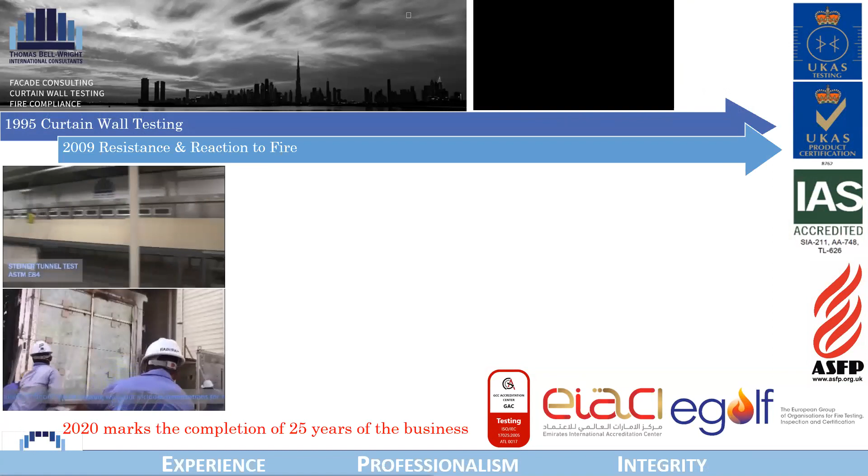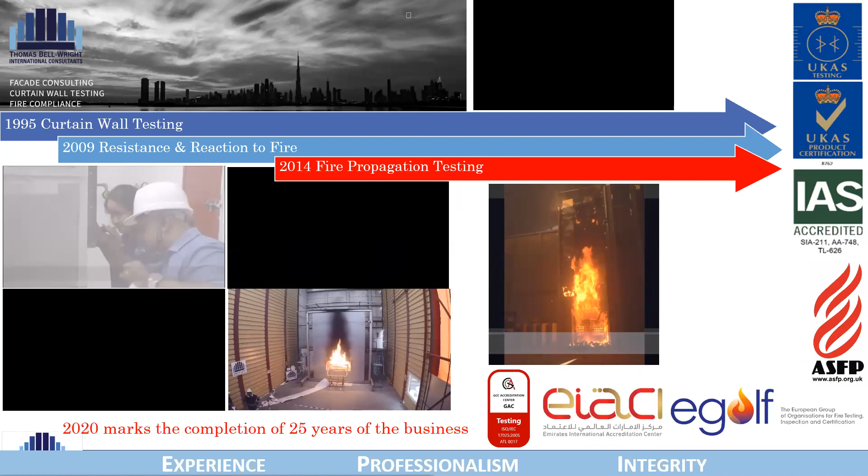Over the last decade or so, we extended our offering to do fire testing, starting with just fire resistance testing and some reaction to fire testing from our facility in Dubai. In the last 6 to 7 years, since I joined, we have grown and expanded in many directions, with an intense focus on cladding related subjects. We have reaction to fire tests to European and American test methods. We are probably the only accredited lab in the world to offer fire propagation tests as per the American standards, the NFPA 285, as well as the British standard, the BS 8414 test. We also have 4 fire resistance furnaces where we can help test and offer conformity services for an extremely large type of passive fire products, materials, and systems, whether fire rated doors, partition walls, or fire stopping material.

I'm assuming a lot of you might know me - you have been seeing my name on the emails related to the webinar. I am Abhishek Chhabra. I represent the company and am extremely passionate about conformity and compliance. Over the last 15, 20 years, I have been heavily involved in selling product conformity services related to safety and quality across several supply chains, whether construction building material, switchgear, renewables, and so on.

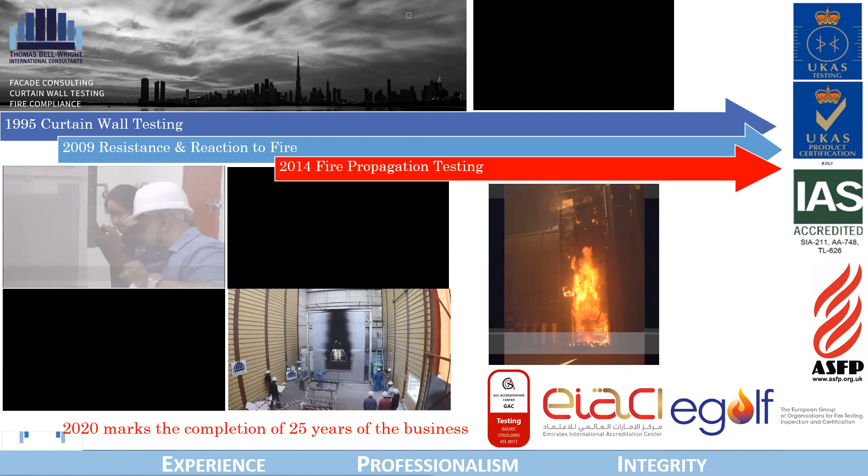Joining me is my colleague Sujana. You would probably see her screen pop up somewhere now or later when she starts to speak. She is a senior fire engineer with vast experience across a large number of tests. She's done probably over 400 reaction to fire tests in a very short span of time, and she is also responsible for the fire propagation tests. She will be talking a considerable portion of the session today.

Before we begin and talk in detail about the subject, I would like to say why are we here? A lot of you are probably familiar. The world over, the construction industry, the regulators, and the finance industry are struggling to solve the problem that has arisen from awareness about these big facade fires that have been happening almost everywhere in the world.

So we have a situation which has two parts. We have a problem related to existing buildings, and it is still not necessarily estimated as to how many buildings around the world are unsafe and have potentially combustible cladding.

Thousands and thousands of buildings are being designed, constructed, and built at this point in time. How do we solve and ensure that these buildings are safe when they start to get built?

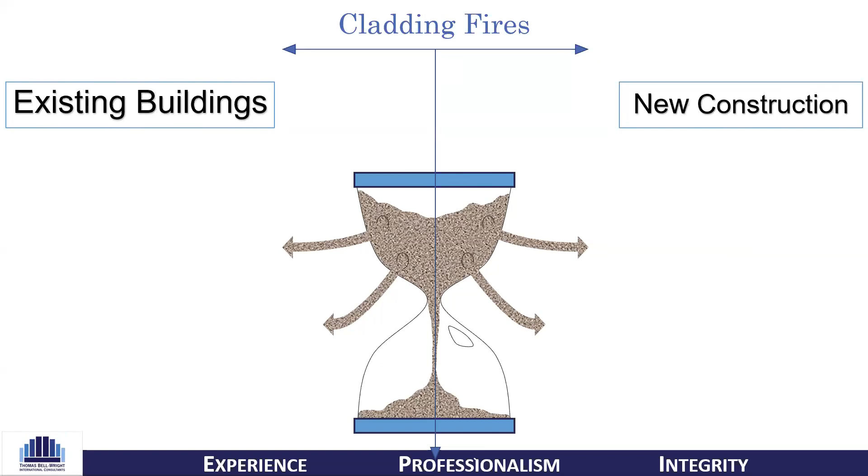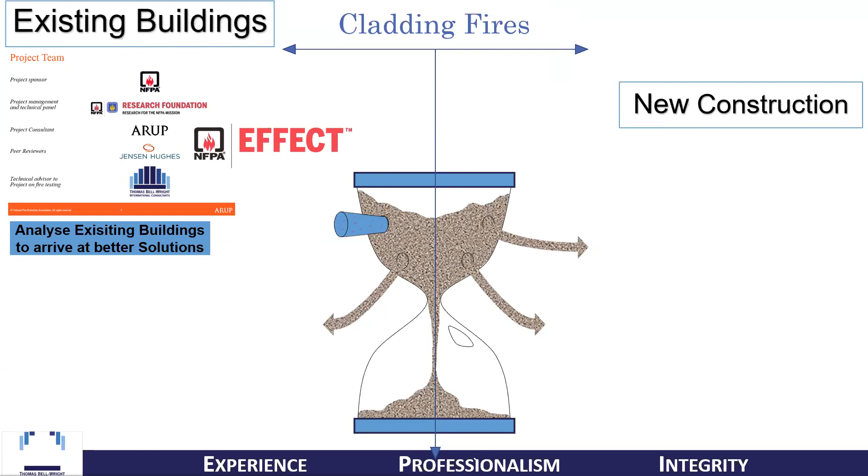Some of you may be familiar with the EFFECT tool, a freely available tool prepared by the NFPA's Research Foundation. Arup was the lead in helping develop this tool, heavily supported by Jensen Hughes as well as us, giving inputs related to correlation of how materials test and behave in small scale and large scale tests.

For new constructions, as a laboratory and with a lot of staff members, we have been heavily involved in supporting UAE's Civil Defense and various authorities in arriving at a better understanding of facade fires, and they have been able to come up with a fairly stringent code which has been implemented.

We have also been involved in several other initiatives, like supporting the Saudi Arabia Standard Organization in evolving a better standard for aluminum composite panels, in order to support implementation of not only the UAE Fire and Life Safety Code, but a better implementation of conformity and conformity assessment.

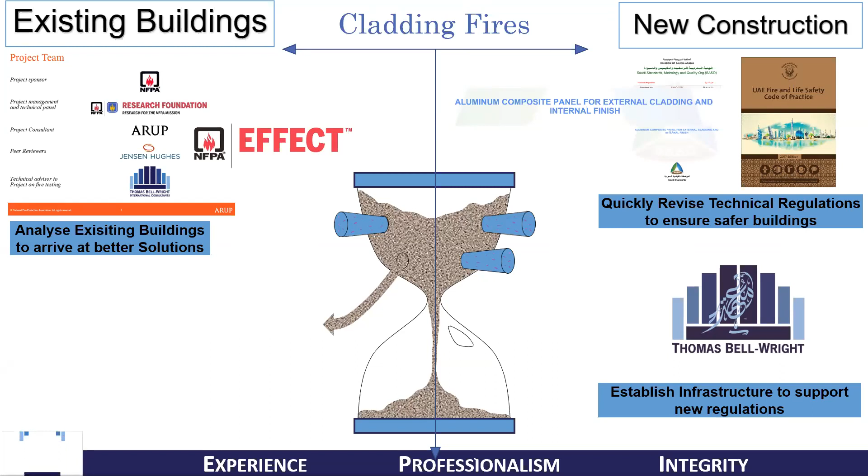We launched our certification mark and became a certification body, and our certification scheme related to materials and systems complying with various test methods and standards for facade application has been very popular. TBW Cert is our certification directory, and most likely at the end of the session, a link to it will open for you.

For existing buildings, we also supported a very exciting project for a solution created by Johnson Controls. On the bottom left of your screen, you'll probably see a small video showing how we built a massive wall, 25 by 35 meters, in our facility to help them demonstrate the successful functioning of their solution.

It's a very interesting active fire solution which senses a fire on the exterior side of an existing building. It's a retrofit solution that taps into the existing water riser, and it is able to sense and quickly bring any fire that is possibly breaking out under control.

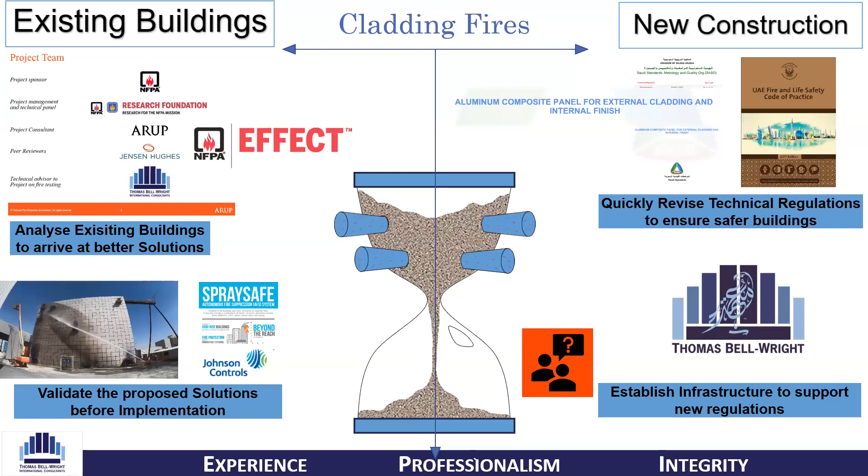What we aim to do today is bring about a much better understanding of three things which are very close to today's subject. These are things related to a mock-up: what is a mock-up, and when a system is mocked up in a lab and tested as per a mock-up test method like the BS8414, which we will be talking about today, or any other mock-up test method like the NFPA 285 — there are about 20-30 test methods around the world, many still in an evolution stage.

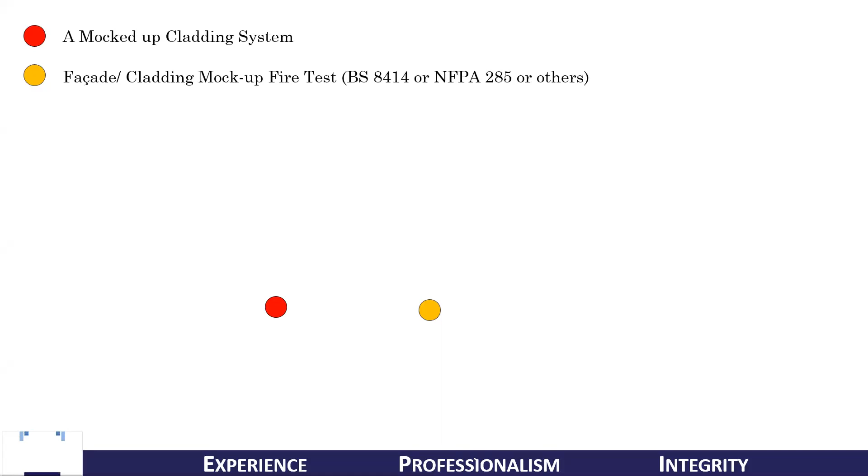And how these two dots not only link, but how they link with the end game in the mind of all of us investing time, effort, and energy in doing these large-scale fire propagation tests — the end game being that we would like to have fire-safe cladding. So how these three dots connect is the subject we will be talking about today in greater detail.

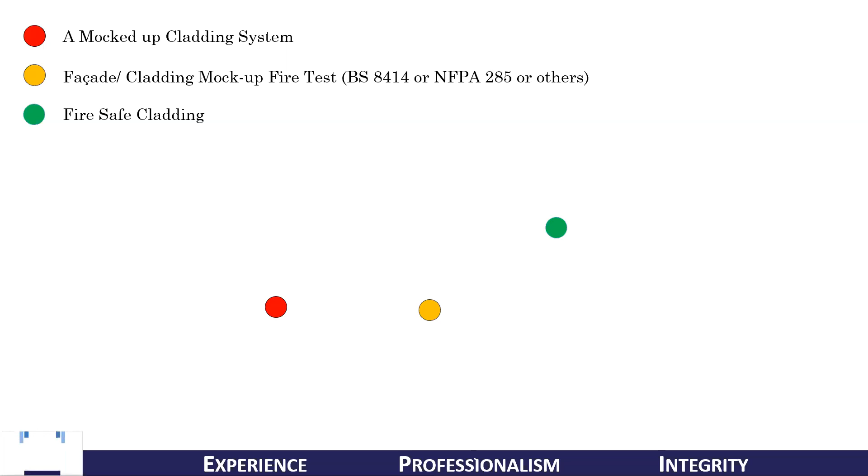After a few slides, I'm going to pass on the presentation screen to my colleague Sue. But before I do that, I think it's very important to understand that there are many things which come in between these two steps.

Even though as a part of this webinar we may not talk about all these things in place at this time, I feel it's important to bring these out to an extent so that when you're listening to the slides, understanding what the test method is and how the test results are used and can be used, it will be good to know this is part of a much larger situation.

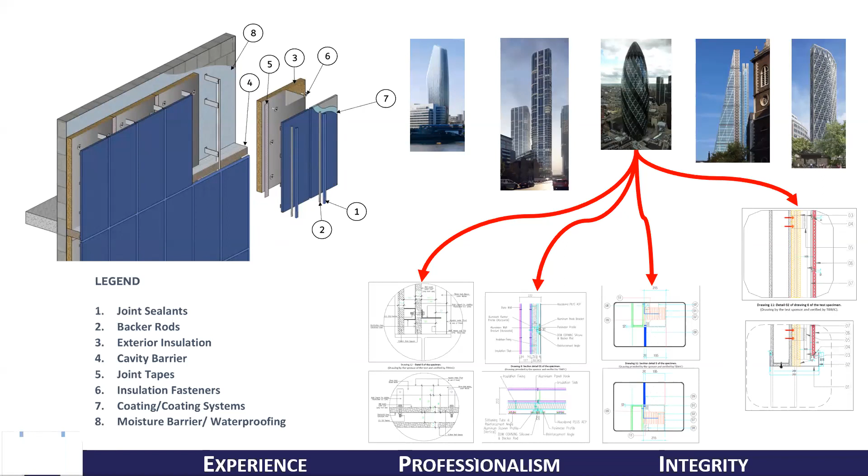People in the audience familiar with how facades and cladding materials come together to provide solutions and the slick looking buildings we see around us know that a simple facade, let alone a complicated one, would have a few hundred drawings, sometimes even more, when different materials are engineered into a solution which helps achieve weather performance, building comfort, and the list goes on. So in the test we understand today, we must keep in mind that an engineered facade system has several different building materials that come together in various forms and shapes.

With that, let's begin our journey towards understanding the BS 8414 test method. We will not only talk about the scope, the coverage, and how the test functions and operates, we will also touch upon the BR135 document, a guideline document that adds on to one of the several ways in which data coming out of the test method can be used to form a regulation or a pass/fail criteria.

We will later also talk about the newly published, very new BS 9414 standard, which is similar to the extended application standards that exist for many different products.

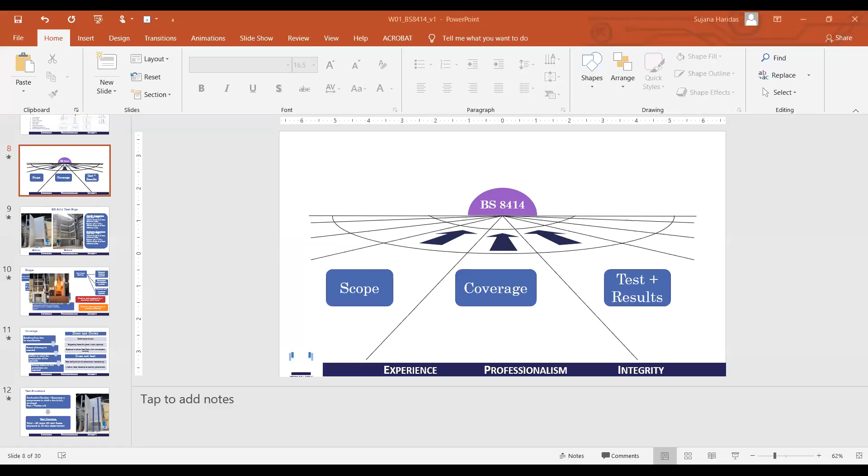Thank you so much, Abhishek, for the wonderful introduction and the information shared. So today we will be discussing the BS 8414 standard as Abhishek mentioned, and then we will have a small discussion about the scope, coverage, and test results of this particular test method.

Now let me familiarize you all with the test rigs of BS 8414. We have two parts for this particular test method: one is BS 8414-1, shown on the left side, and the other is BS 8414-2, shown on the right. According to the standard, both these test rigs have the same dimensions.

It has a height of 7.7 meters from floor level, with two different wings: a main wing and a return wing or wing wall. These two wings have minimum dimension requirements according to the standard. The main face must have a minimum width of 2.6 meters, whereas the return wing must have a minimum width of 1.5 meters. But a contractor can come up with a different dimension for their test specimen, which is completely acceptable according to the standard.

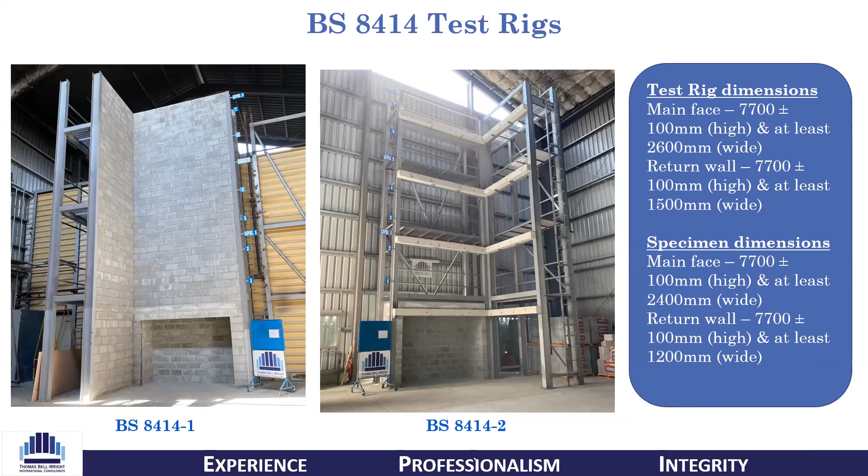For example, if you have a sandwich panel system on site which won't have a backing wall or base wall, or there won't be any substrate behind it, such a system can be recreated in the BS 8414-2 test rig. At the same time, you can have a drywall partition onto which an ACP or aluminum composite panel cladding system is going to be fixed—such a system can also be recreated in 8414-2. So this test rig gives more flexibility for the contractor to choose the actual design on site.

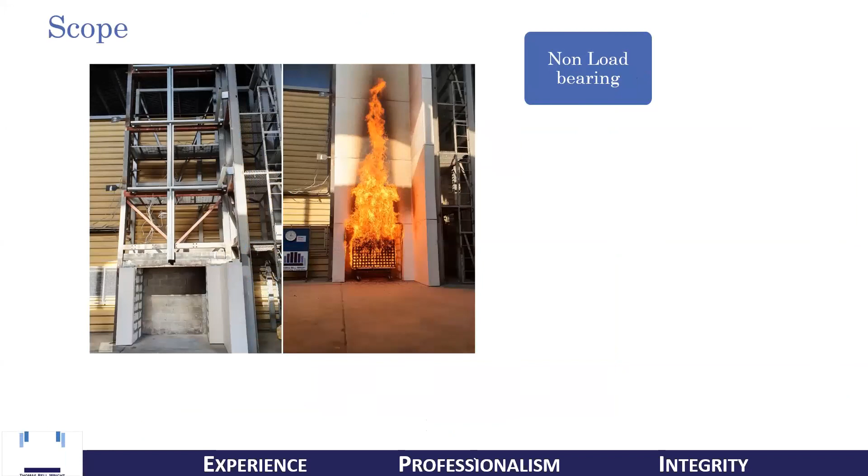Now we have the scope of this particular standard. This standard's intention is to analyze the fire performance of non-load bearing external cladding systems, rain screen overcladding systems, and external wall insulation systems when fixed to or supported by a masonry substrate, according to BS 8414-1.

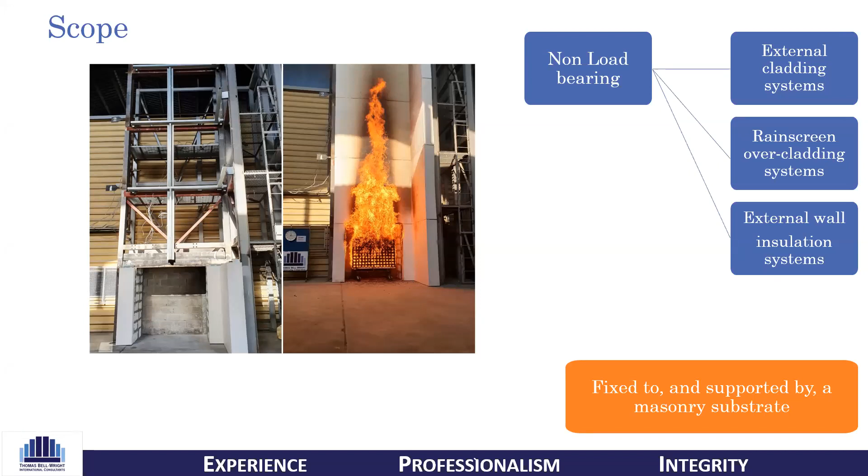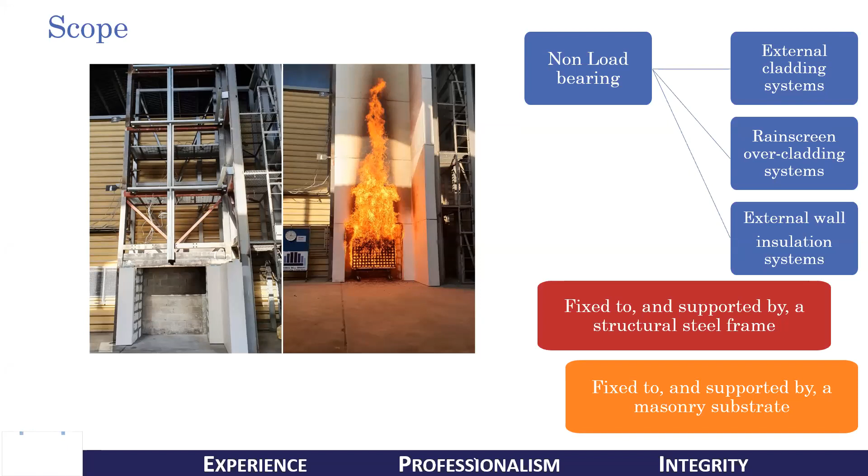The fire exposure of this test method represents an external fire source, or a post-flashover fire in a room venting out through an opening and exposing the cladding to the external fire flame. That means you have a building where the fire is contained in a compartment, and there is a chance of that fire getting out, or venting out through an opening.

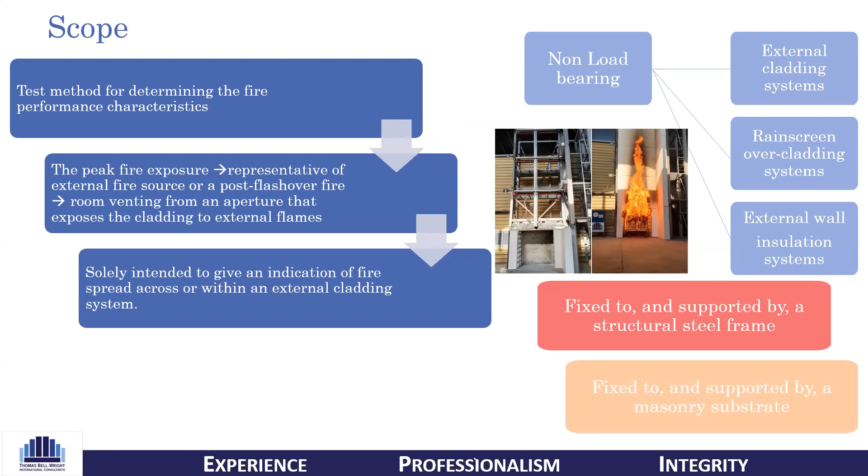That opening can be an existing one, or it can be a new opening created due to the fire. So when this fire breaks out through such an opening and hits or attacks the cladding system, how this cladding performs under such a scenario is what is represented or recreated in this particular standard. The sole idea of the standard is to give an indication of fire spread across or within the external cladding system.

The data we obtain from this particular test method will enable you to evaluate the fire performance of the components when combined to form a complete cladding system.

As Abhishek discussed earlier, there are certain components involved in the design of all external cladding systems. It can be either insulation, or any fixture like brackets, or fire barriers. There are a lot of components involved in the design of an external cladding system. All these components alone have their own fire performance or reaction to fire.

But when all these components are put together as a system, and then exposed to fire, how it's going to perform as a whole system is what we are recreating in the BS 8414 test method.

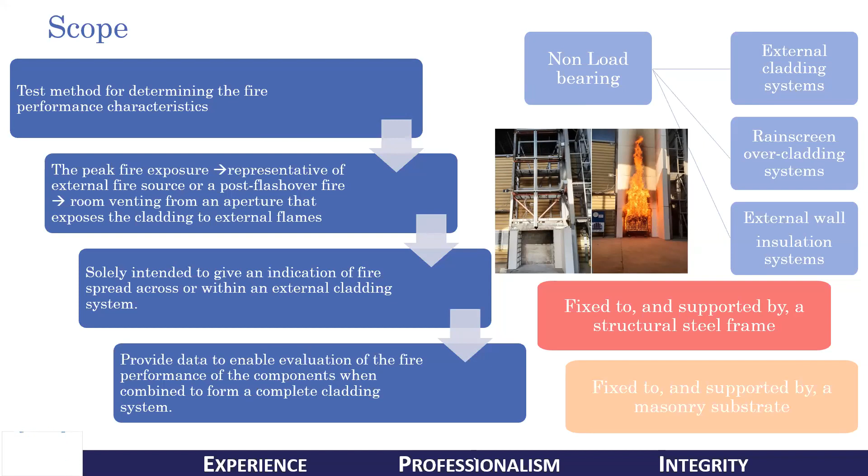From this particular test method, it will cover benchmark data for the classification of the cladding system that has been tested. It will also speak about the extent of damage occurred for the system when exposed to fire, and provide insight about the cladding's ability to resist the propagation of fire upward.

Falling debris is a very important parameter that has to be considered in a real fire event, so this particular test method also considers that parameter. It will also give you the extent of penetration during the fire exposure.

What BS 8414 does not cover, or what is not included in this particular test method, is the performance of glass. It cannot give any idea about the performance of the glass. The supporting frame for glazed window openings are also not covered by this particular test method.

And in this test method, it is not considering the exposure to radiant heat from a fire in an adjacent building.

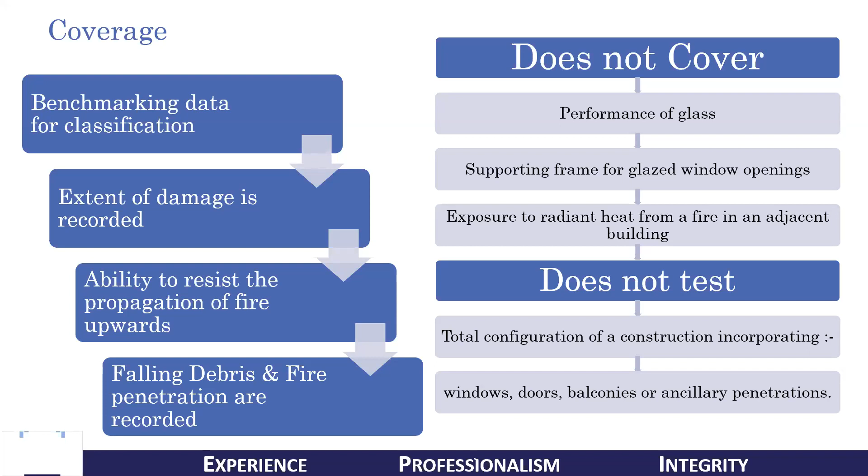What is not suitable to be tested here is the total configuration of the construction, incorporating windows, doors, balconies, or any ancillary penetration, which cannot be tested fully in this test method. Contractors can come up with a design that involves windows, doors, or such ancillary penetrations, but such a system as a whole cannot be tested according to BS 8414.

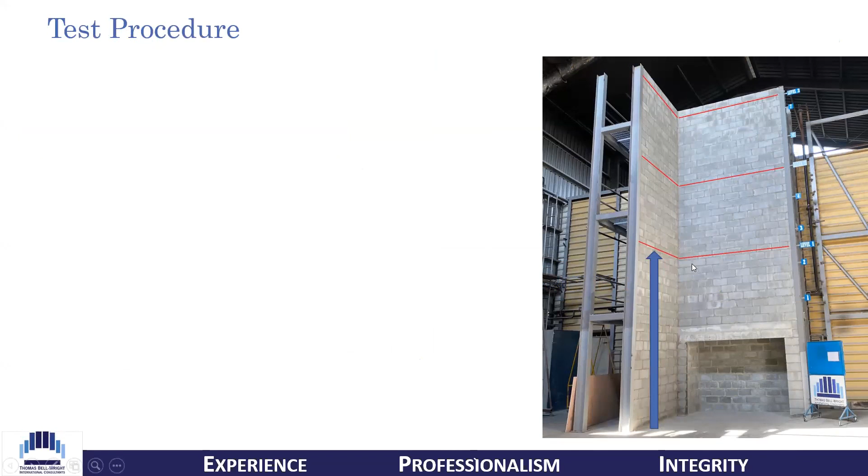Now, as you can see, there is a BS 8414-1 test rig. There are 3 different levels for this particular test rig: level 1, level 2, and level 3. Since I'm talking about 3 levels, right now we are only discussing the BS 8414 2020 version, because the 3rd level test procedure is only based on the 2020 version. But we will also discuss the key changes in the 2020 version compared to the previous version of the standard. Right now we will discuss the test procedure according to the 2020 version.

According to this version of the standard, the test rig has 3 different levels: level 1, level 2, and level 3. Level 1 is located at a distance of 2.5 meters above the head of the combustion chamber, and the rest of the 2 levels are also separated by a distance of 2.5 meters from each other.

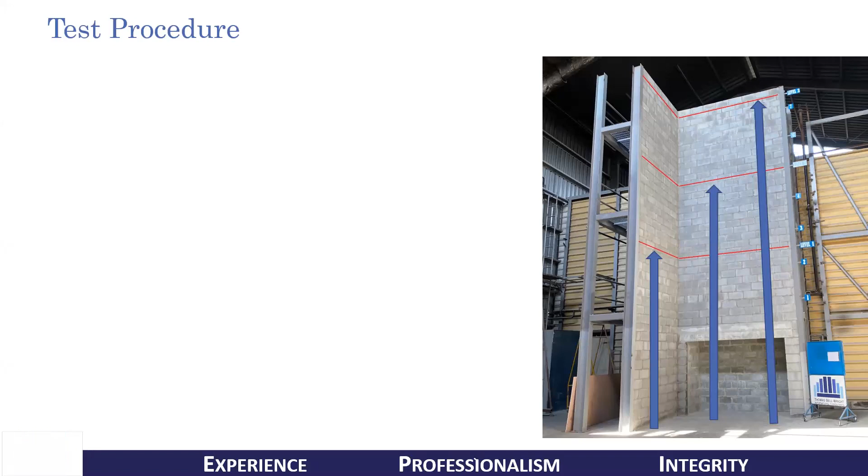As you can see, there exists a combustion chamber on the bottom part of the test rig, which represents a compartment in which the fire is fully developed, and a wooden crib is introduced as a fuel source inside the combustion chamber.

In all 3 levels, both internal and external thermocouples are introduced. Internal thermocouples are introduced in each internal layer when the thickness of the layer is more than 10 mm, such as an insulation layer with a 50 mm thickness or an air cavity layer with thickness more than 10 mm. Any internal layer with thickness more than 10 mm must be introduced with an internal thermocouple at the mid depth. This is to analyze the performance of all these internal layers when the system is exposed to fire. The data from all these thermocouples will be recorded throughout the duration of the test.

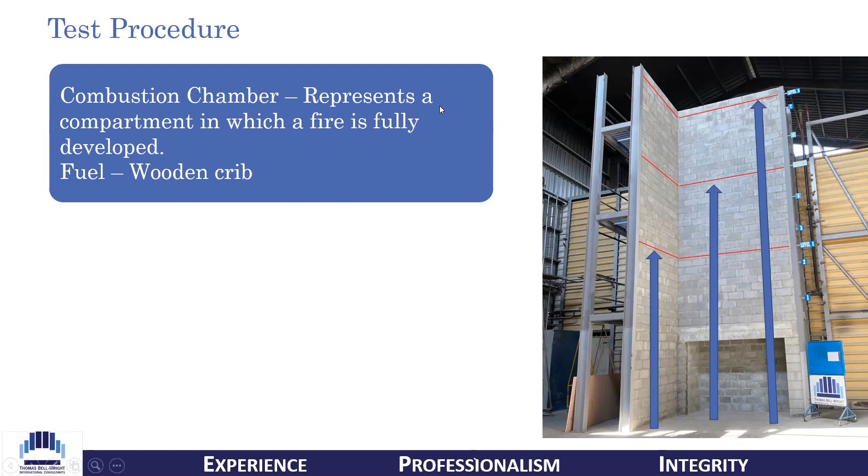For the test to begin, there are certain conditions that have to be obtained to commence the test. One among them is the temperature criteria, and the other is the wind velocity criteria.

Before starting the test, that is when you are going to ignite the crib, 5 minutes before that, the mean temperature of the thermocouple at level 1 should be recorded, and that is considered the start temperature, which should be within 20 plus or minus 15 degrees Celsius. Once again, the temperature on the level 1 thermocouples just before 5 minutes of ignition of the wooden crib must be recorded as the start temperature.

We have one more criteria, the wind velocity. This is also a very important parameter which can influence the test results. Before we commence the test, the wind velocity should not cross 2 meters per second. It should be less than 2 meters per second by any means.

Once we start the test, we cannot say that the test has started when the wooden crib is ignited. There is a start time, which is the time when the temperature recorded by any external thermocouple at level 1 equals or exceeds a 200 degrees Celsius temperature rise above the start temperature, and stays above this value for at least 30 seconds. When the temperature at the level 1 external thermocouples exceeds about 200 degrees Celsius of the start temperature, then the test has been started.

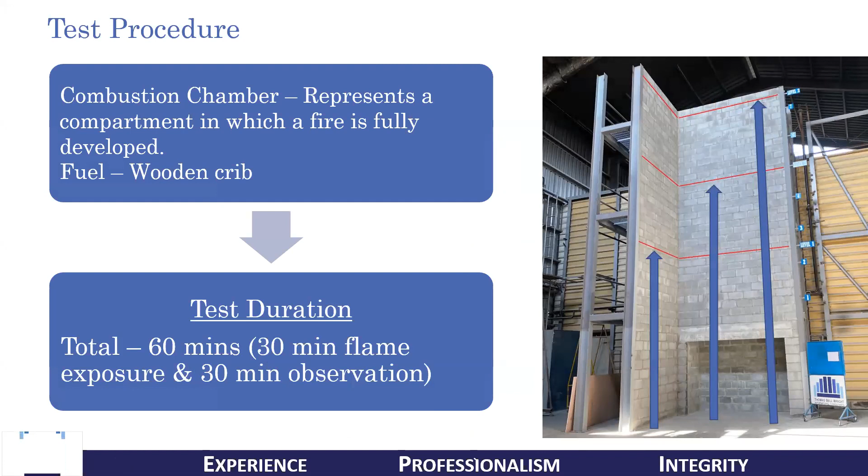There exists an early termination reference line on the 3rd level. When the flame spread exceeds or extends above the early termination line, the test shall be terminated.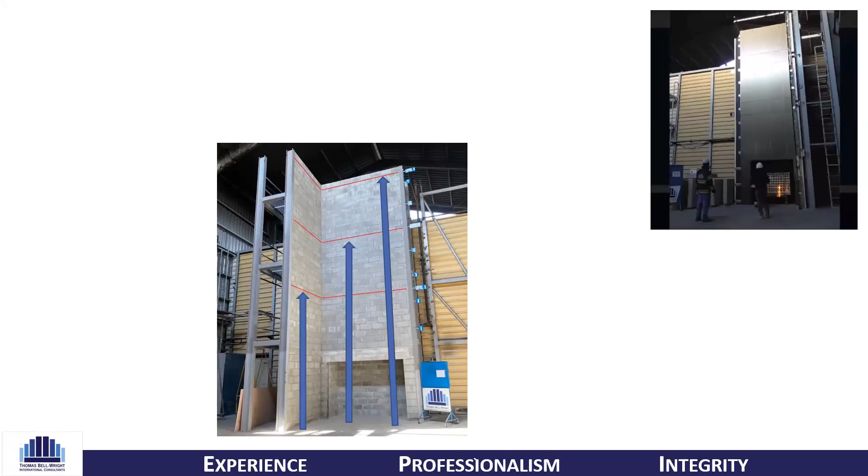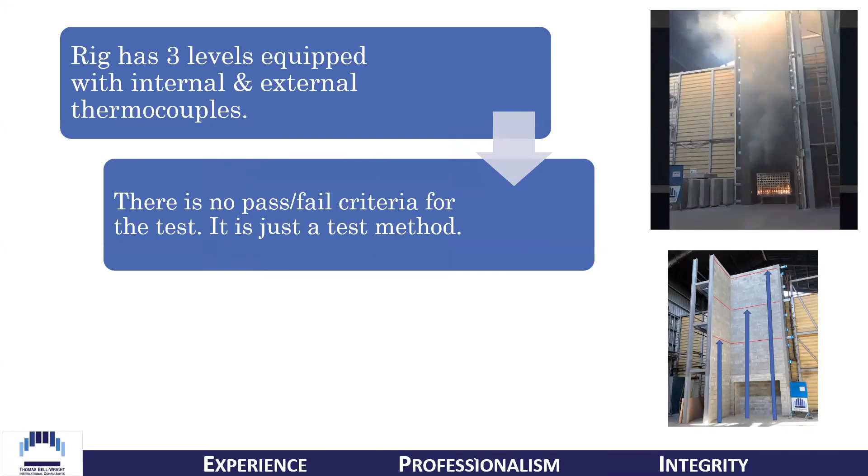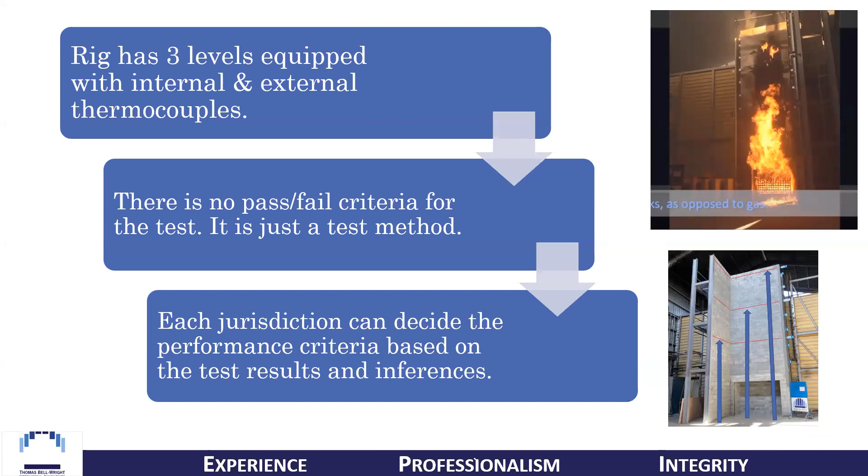With this, whatever data you are obtaining, you cannot say whether it is a pass or fail. This is just a test method. You will be just collecting the data. It does not have any pass or fail criteria. So each jurisdiction can decide the performance criteria based on the test results and inferences obtained from the test method. Depending upon the occupancy of any building, one can choose how stringent that performance criteria should be. If the occupancy level is really low, one can negotiate the performance criteria as well.

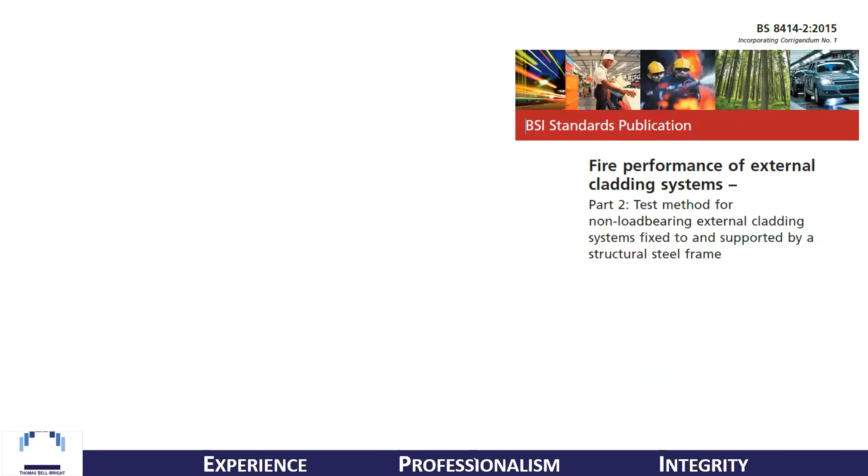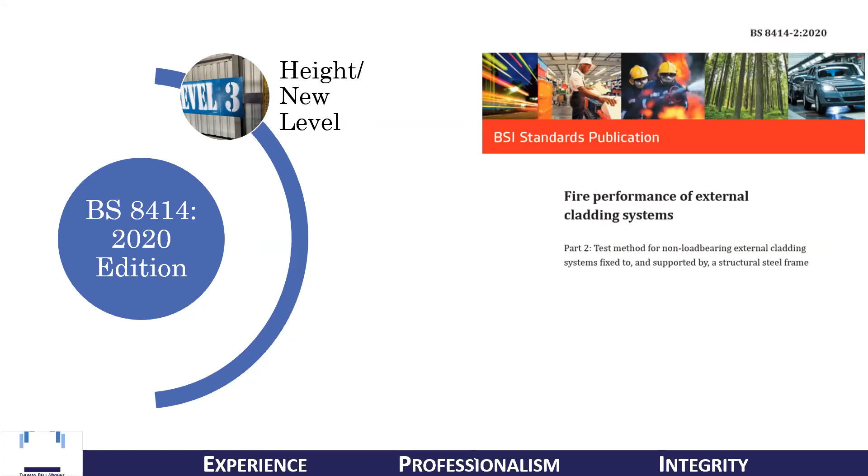Now, as I mentioned before, we will be comparing and finding out what are the new changes in the 2020 version of the standard. We have a new level in the new version of the standard, which is the third level. According to the previous version, there were only two levels, level 1 and level 2. In the new version, a third level has been introduced, and we will be getting more data because of the new level. An early termination reference line has been introduced in the third level. That is also a change in the new version of the standard.

Then we have an improved accuracy measurement for the wind velocity. In the previous version of the standard, it was 0.5 meter per second, whereas it is improved to 0.1 meter per second in the new version of the standard.

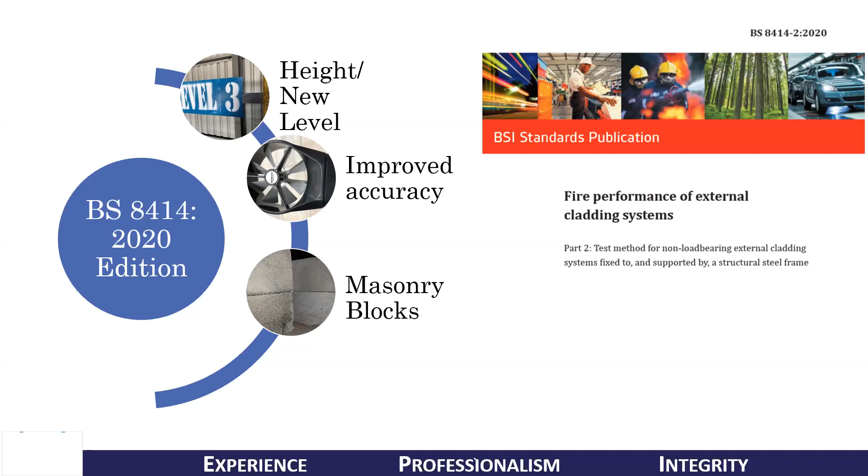For the BS 8414-1, the masonry blocks we are using had certain specifications like density, thickness, thermal conductivity, and compressive strength. Previously these were minimum values, so any block with that minimum specification or greater was acceptable. But the new version of the standard is very strict, demanding the exact nominal specification mentioned in the standard. The same nominal values must be followed for constructing the BS 8414-1 test rig.

The new version of the standard also demands calculation or quantifying of the damaged area. In the previous version, it was just an observation. In the new version, the observation parameters and what has to be observed are explained in much more detail.

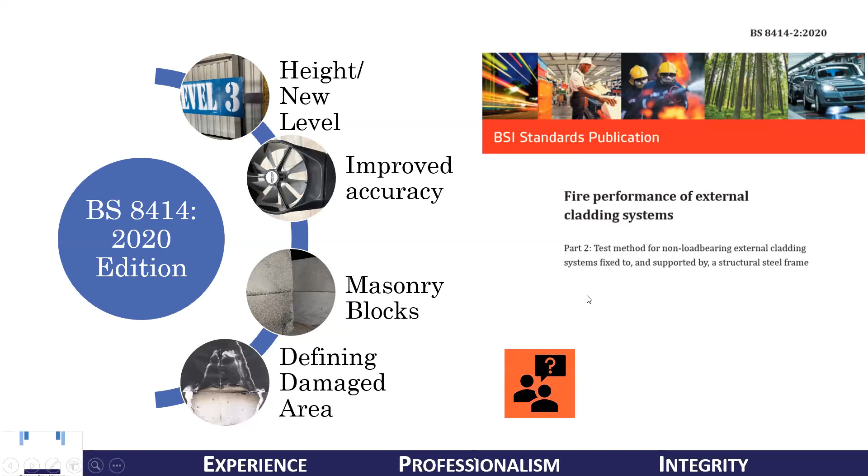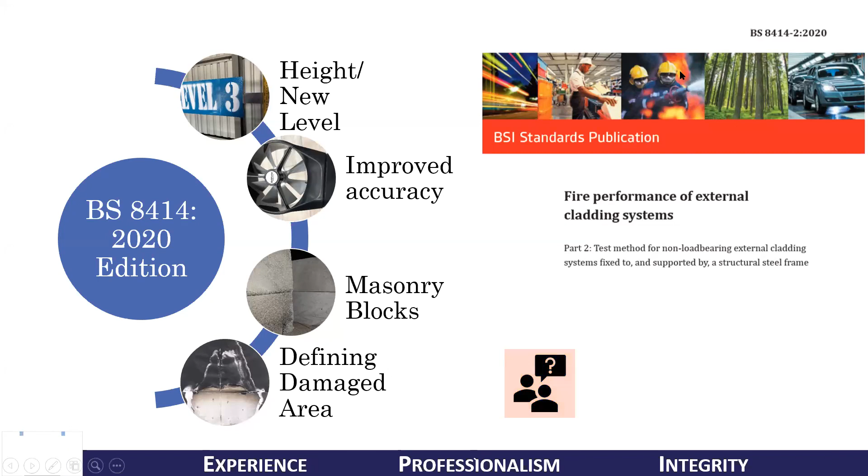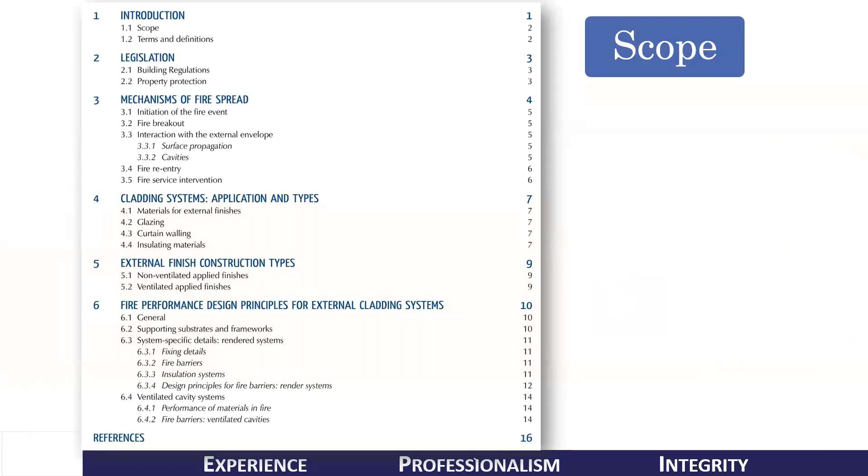Now we have another document or guideline, BR135. As mentioned before, BS 8414 is just a test method, it won't give you any pass or fail criteria. BR135 is a guideline document introduced in the UK that speaks about the fire performance of external thermal insulation for walls of multi-story buildings. This document gives an idea of what parameters must be considered for the safety of a cladding system while designing or installing it.

It's a guidance document addressing the principles and design methodologies of non-load bearing external cladding systems. It illustrates scenarios based on typical examples of current practice, but this field is subject to rapidly changing designs and materials. Given the variety of materials and complicated designs in the current market, we cannot have a strict written rule for everything. So this guideline helps focus on which parameters impact fire design and how to design the system safely using these guidelines. That's the main idea of BR135.

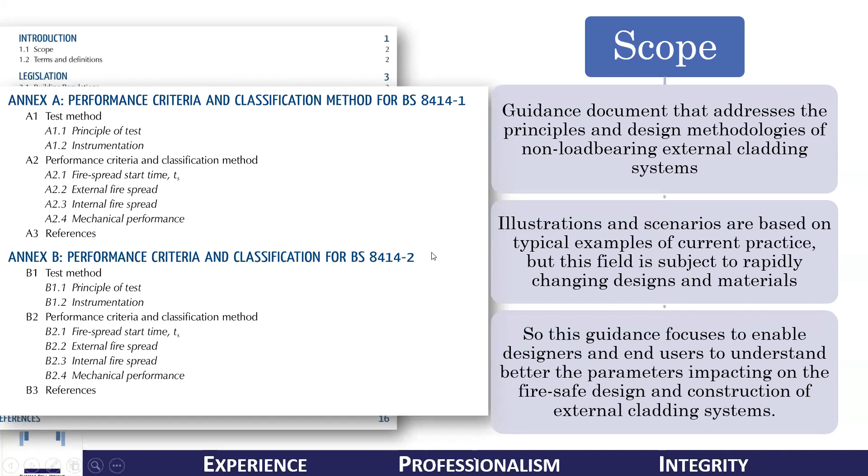In the annex, it talks about performance criteria based on the BS 8414-1 and 2 test methods. Anyone wanting to classify their cladding system based on BR135 must conduct a test according to BS 8414-1 or 2. Based on the data obtained from that test, there are three performance criteria, and using that data, the BR135 classification can be done.

One point I would like to add is, even though you have data from BS 8414, sometimes there's a chance of early termination during the test. For example, if the test was terminated at about 30 minutes, you only have data up to 30 minutes. In such a case, the system cannot be classified based on BR135.

You need complete data for the full 60 minutes duration of the BS 8414. Only then can such a test be valid, and only then is the test valid for classification.

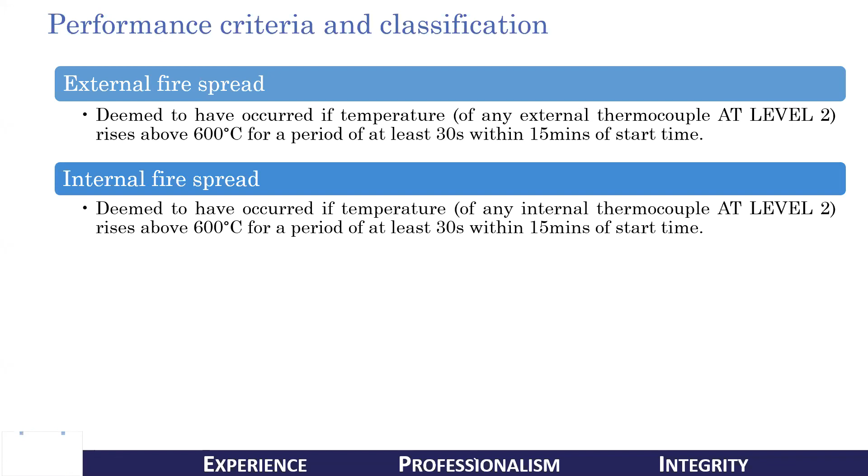Based on BR 135, for a system to fail because of external fire spread, any thermocouple's temperature at level 2 should rise above 600 degrees Celsius for a period of at least 30 seconds within 15 minutes of the start time. Even though you're considering the initial 15 minutes for classification, when the test was terminated, data after that cannot be used.

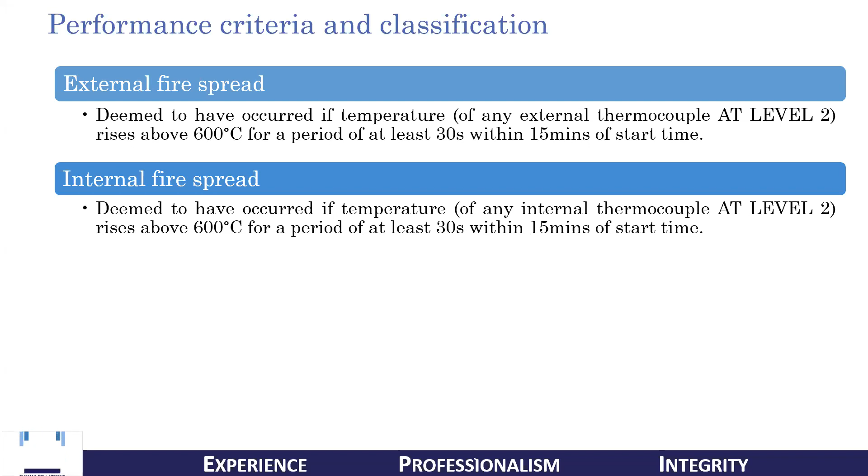Similarly for internal fire spread, if any thermocouple in the internal layers at level 2 raises above 600 degrees Celsius for a period of at least 30 seconds within 15 minutes of the start time, then it's a failure because of internal fire spread.

There is also mechanical performance, but there is no criteria set as such. From the test method you will get to know all the mechanical phenomena like spalling, collapse, and that sort of thing, but there is no criteria set for it.

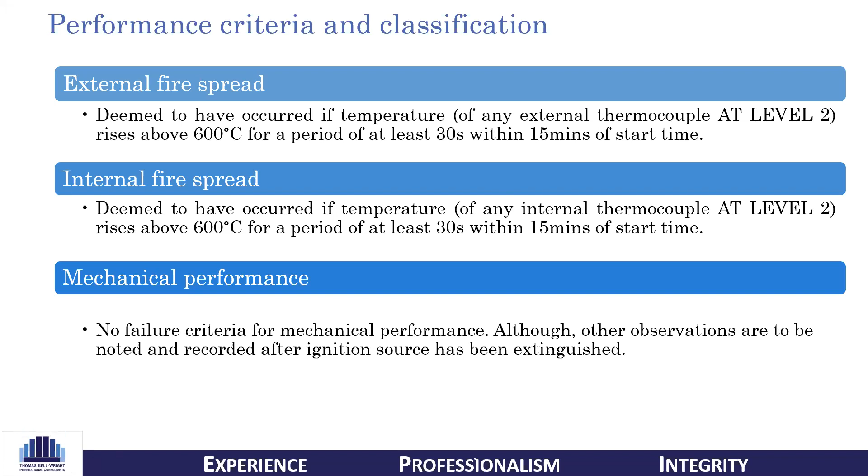From there we will move on to the recent document, the recent standard introduced in 2019. The BS 9414 test standard speaks about the feasibility of changes that can be done on a tested system.

For example, if you have tested your cladding according to BS 8414-1, but in the real case you wish to fix that cladding system to a drywall partition, a drywall structure, or a steel structure, what is the feasibility of that? Is it okay to safely construct such a system using the data you have in hand from the previous 8414 test?

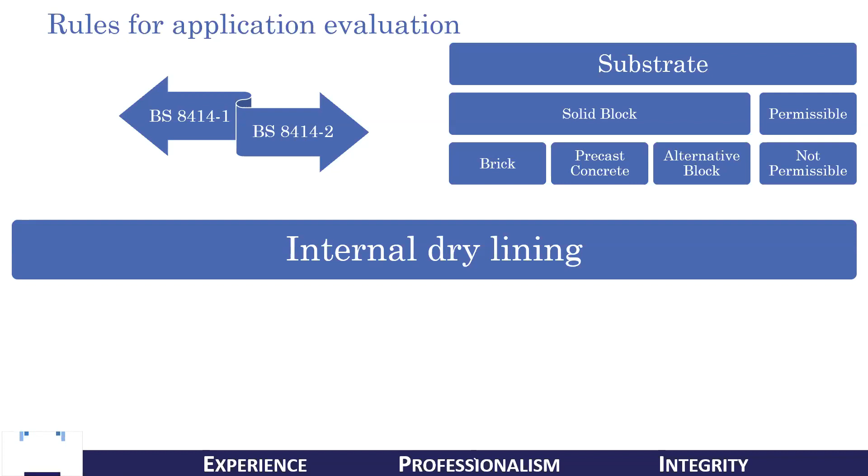What documents are required to submit for conformity? The BS 9414 talks about all such information, and for each and every component, what changes are feasible to implement safely.

For example, if there is a drywall partition and the lining board thickness was say 30mm, and one wishes to change it to 10mm in the real case or in the field, is it possible? If it is possible, what data should they submit to the certification body in order to accept that change?

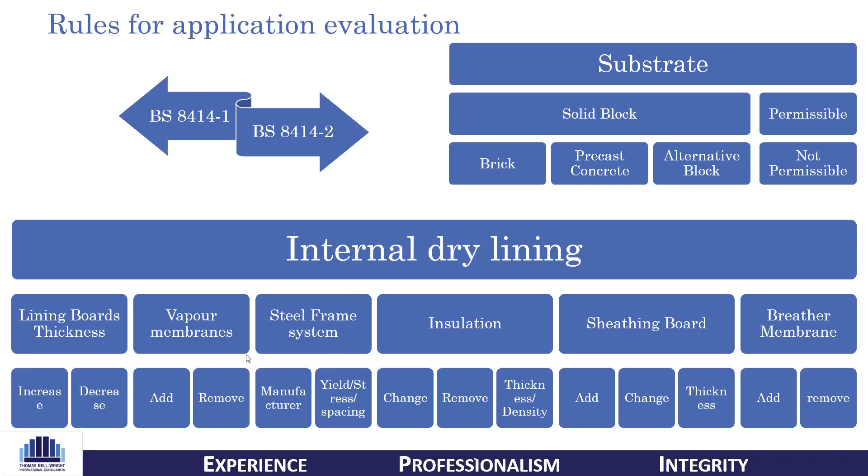All these matters are discussed in this document, helping us understand the system better, what changes are possible after testing, and without further testing, what changes we can allow without affecting its safety concern. So this is what BS 9414 is all about.

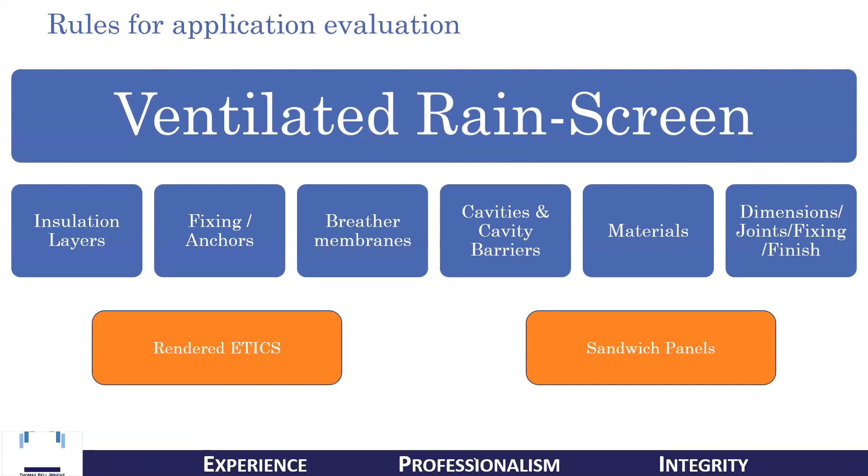So that's from my part. I hope you all understood what I was trying to explain. And now over to you, Abhishek.

Thank you very much, Sue. I think we had tasked you with an extremely difficult project. Just for all the listeners, Sue will normally conduct a training program on these three documents for about 4 or 5 hours each. They are very detailed documents. She's a good trainer, and it was quite a project when I asked her that she has maybe 15 or 20 minutes to do all of this.

I believe she's tried to do justice, but for some people who joined in a little late, I've got some messages coming in to me privately that maybe they could not hear everything. So I'm just going to quickly summarize and give an explanation about what she has been talking about, so there is a little more context to the last few slides that I'm going to take on.

It is important to know that the test method is a laboratory condition that has been created. This laboratory condition tries to mock up a potential scenario in the field where the fire breaks out of an existing real opening, or an opening that gets made because of a fire. What the test does is try to replicate a fully grown fire and how it will attack the whole system.

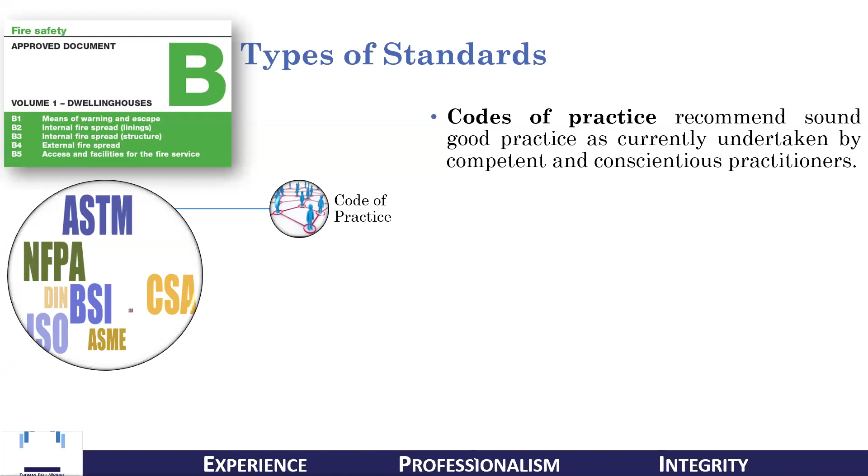It is common in practice that new designs, new materials, and new types of applications, or sometimes even the occupancy type where a building is adding a feature, component, or material, is not covered or was not thought about in the code of practice. So the code of practice is a good guideline document to get an essence of why something is being done.

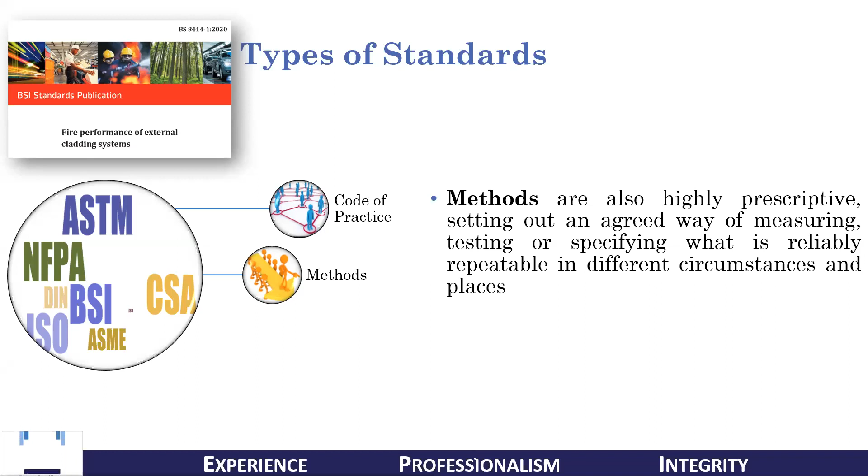Methods, on the other hand, are very, very prescriptive. These documents often create repeatability. And what is repeatability for tests? What is repeatability in specifications? Often these documents define how repeatability should be maintained.

And then there are documents which are guideline documents. These are less prescriptive. These reflect the current thinking. And when I say current thinking, I mean when the guideline was published, not the current thinking when you are reading the guideline - the input of the experts who were involved at that point in time, based on their understanding of the less prescriptive advice given.

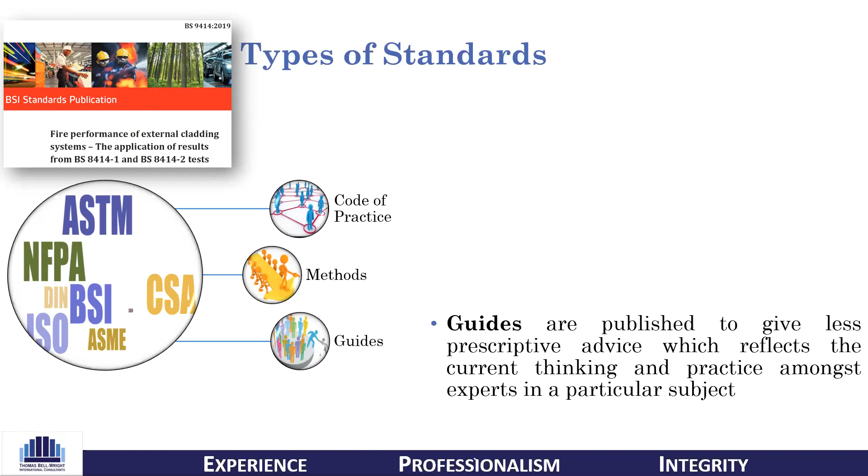So care should be taken when we look at test methods, when we look at guidance documents like the BR135 or the BS 9414 document, to understand what these documents bring about.

Jumping on, we all know that trade has increased so many folds since the GATT Accord or the WTO was signed many, many years ago, and it gave birth to many different methods, rules, or criteria to assess sellers or buyers of materials.

What started off with ISO 9001, a system certification - I'm sure almost everybody will be familiar with system certification, whether a manufacturer, trader, or contractor has certain processes that they follow of keeping records and so on. This was the primary tool to assess, many years ago, whether a supplier is good or not.

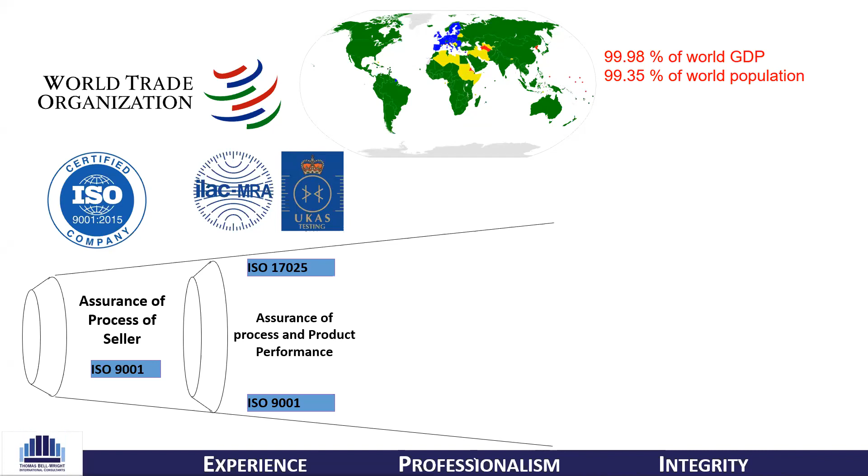Later on, people started relying on test reports, so that for each shipment at times, the materials or products supplied were picked up and tested for various criteria, whether performance, mechanical properties, physical properties, or a very critical property like fire behavior. But this was not enough, and it was not even practical at times for materials coming from far away.

Test laboratories were not available everywhere. So what evolved in many places in the world, and for many products where conformity needs to be very strict, is something called certification and listing. This is a process I've talked about a lot in the past, but certification and listing normally introduces a feedback loop.

The third-party independent certification body would not only create traceability between how products and materials are manufactured in the factory and what is tested, but also increase assurance by auditing the manufacturing locations to check whether they have processes and procedures in place that bring about the repeatability that is needed.

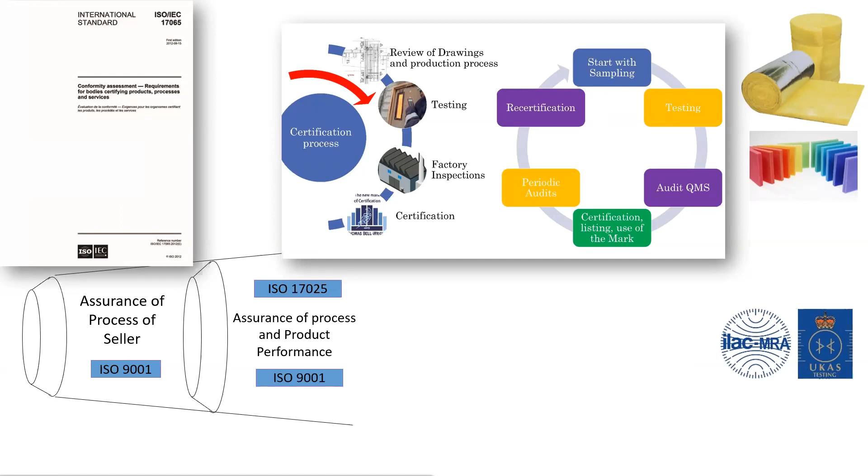To empower and formalize these processes, I want to share a table from a standard called ISO 17065. This document helps third-party certification bodies develop schemes, methods, or protocols on which they will provide assurance, and there are several things listed in it.

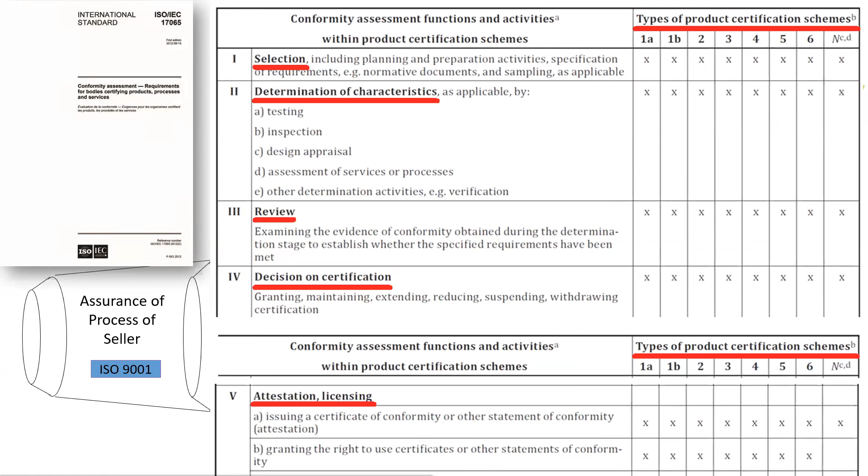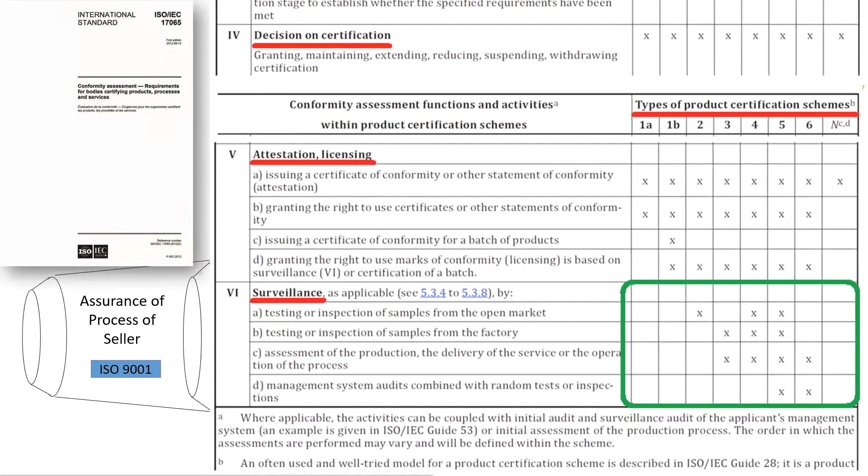Without delving into all the details, I want to bring your attention to a segment you can see on your screen right now, marked in green. Several certification methods have some stringent requirements to create a feedback loop.

When a product has been certified, there is an assurance mark on the product. How will it be verified? Is there someone who will pick up a sample once in a rare while from the field and test it? Would you do a spot check? Would you audit the factory? There are different processes and measures that have been put in place, and some certification methodologies are much more stringent than others.

I created this slide because among the attendees registered for this session, there have been a large number of people from around the region—not just MENA, but the UK, North Africa, and India—people who are authorities having jurisdiction or their representatives, contractors, architects, designers, consultants, people creating the framework that defines conformity, and people writing specifications.

I think it's important to know how compliance is driven down on a piece of paper. People in the UAE might be familiar with what you see here as Type 5 on the screen. Let me try and show this to you. This, Type 5, is the level of compliance that the UAE Civil Defense in their fire and life safety code have actually mentioned as a requirement for conformity.

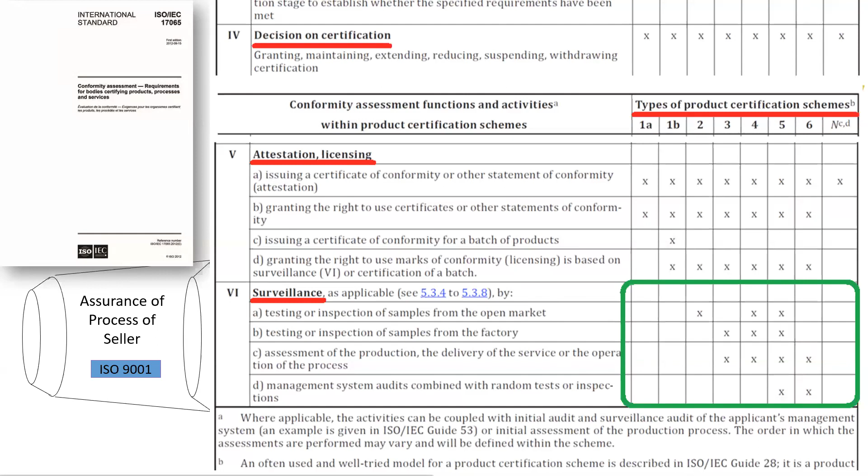So the authority having jurisdiction has gone to this depth in the UAE, not only asking for certification and listing, but also defining the methodology by which the third-party certification body will ensure that this listing or conformity is being done. In countries like the UAE, and several others, there's an additional step—like in Dubai, where the product, based on the certification and listing evidence, has to be registered with the authority having jurisdiction, like the UAE Civil Defense.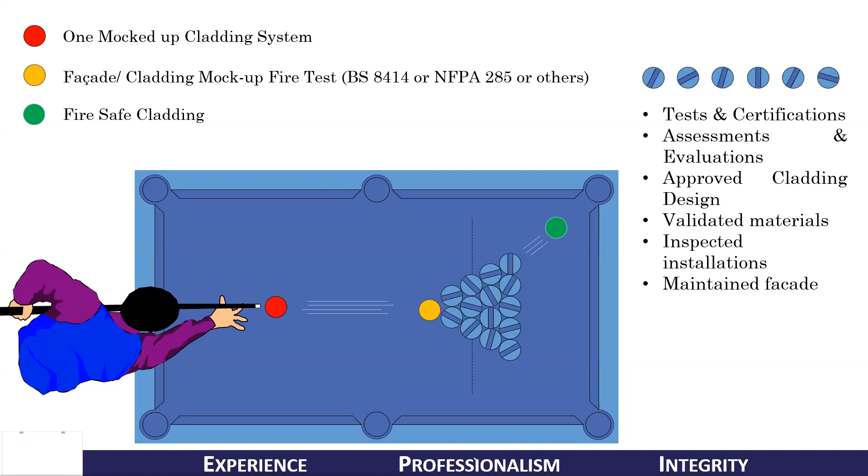But I want to go back and conclude that here are some steps that you can take if in writing commercial or technical specifications to ensure that your liability is minimized. Whenever you are procuring material, it is important to define the compliance requirement with the right kind of references. If you're asking for certification and listing, if you're asking for a legal requirement, define what is the level of certification and listing that you want. Define whose responsibility it is.

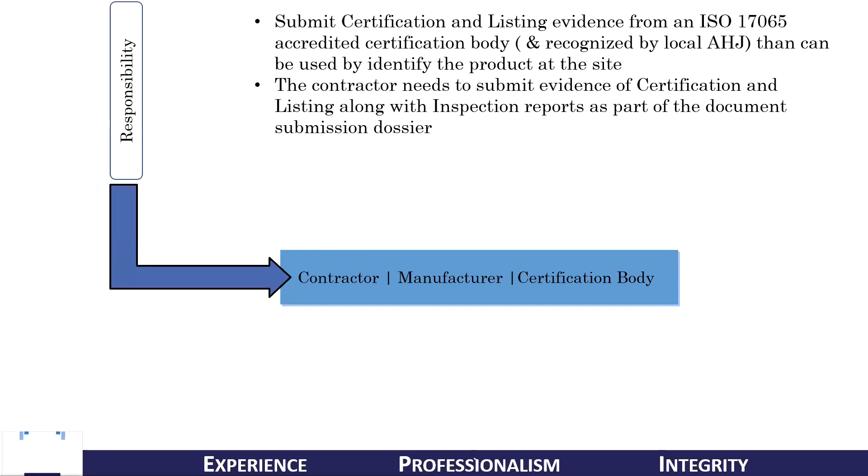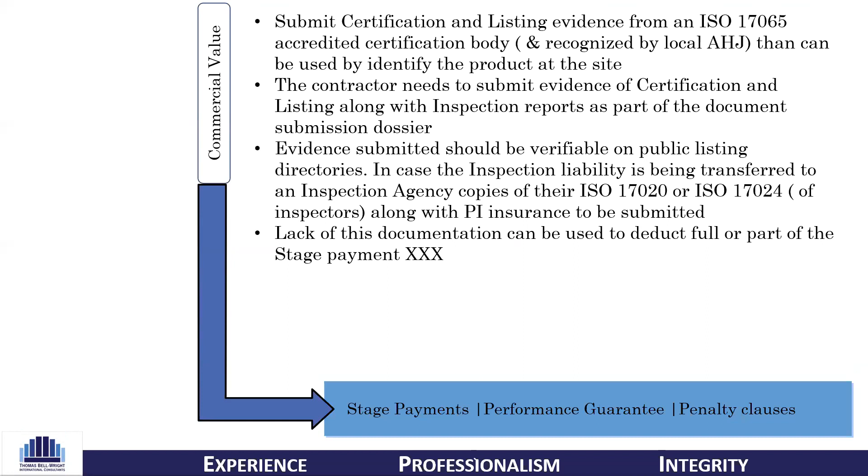Is it the contractor? Is it the manufacturer? Is it the certification body? Who is responsible for what? It is important to clarify these things, because as you have seen and you are seeing more and more in the world around, with a lot of investigations happening everywhere, trying to drill back and understand who has erred, whose mistake it has been, it is important to have all of these things not only very clear, but crisp and documented. And last, apart from documentation, it is always good to add the additional incentive or additional linkage with the commercial contracts in place between the buyer and seller to ensure that your liability is minimized.